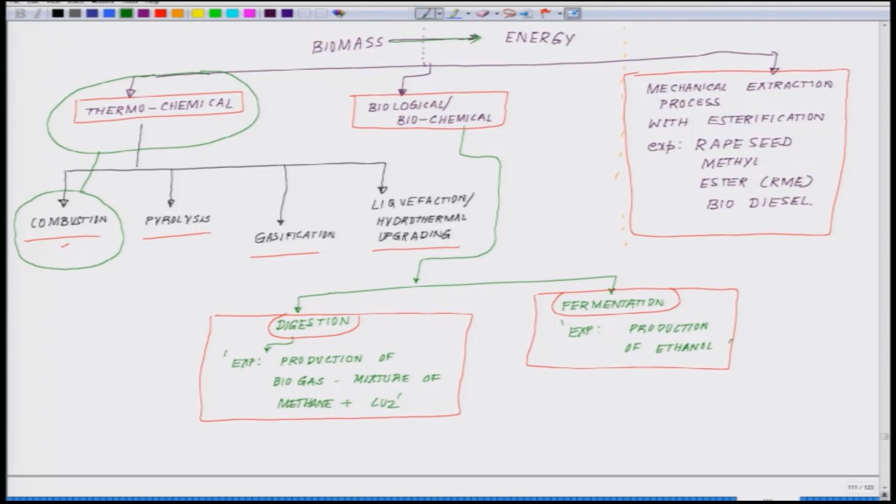So, today we will come back to the chart where we left in the last class. This was the outline we formed, biomass to energy formation, and today our goal will be to understand the most primitive and simplistic of all thermochemical processes, the combustion process. So, let us move on to the slide. As we do in every class, first we will talk about simple combustion.

Combustion is a very straightforward thing. You take a biomass, paper, vegetable waste or anything, and you all have seen cow dung being dried and used as a fuel. Every Indian has seen this. Each one of us has seen people cook with wood during the winters or any other day. These are common things. So, wood is a biomass, cow dung is a biomass, and you are burning them in the presence of air. That is all combustion is about.

When you burn something in the presence of air, you have oxygen in the environment. Your biomass has a lot of carbon, it reacts with the oxygen, and it generates 2 things: carbon dioxide plus heat. Now, what you do with that heat is very important, and how you can process that carbon dioxide. So, let me graphically put across what I have just said.

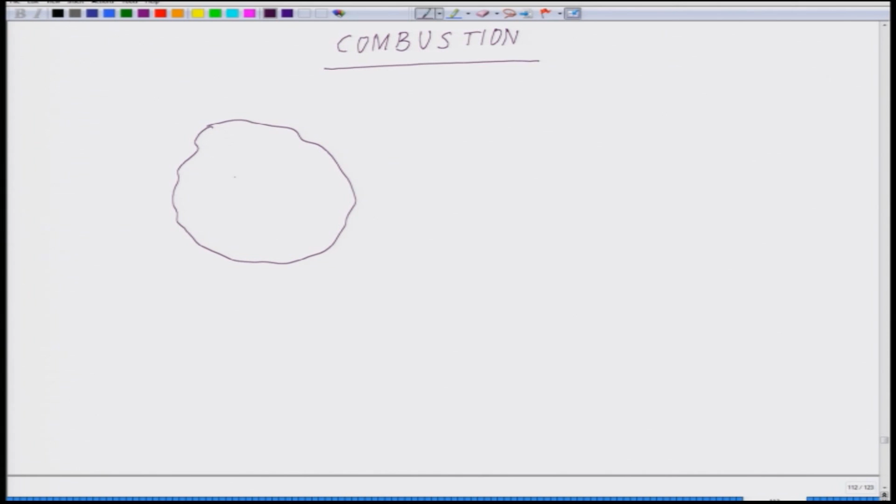So we are dealing with combustion, and say we have a finite amount of biomass here. One thing you all must have observed in villages or rural places is cow dung being used as a fuel after drying. What that drying does is remove the water from it. This brings you back to the very first point about the properties we talked about, intrinsic water and extrinsic water. Remember, we talked about the water concentration.

So, essentially you are getting a biomass, the feces of a cow or a buffalo, which is rich in water. You are drying it in the sun, getting rid of the water, and then using it. You can think of it very simply. Let me go to the new slide. So, say for example, you have cow dung.

This is a good example for you to understand. So, you have two routes. One route is that, so it has a significant amount of water trapped in it, okay, plus of course carbon material, carbon and all other things: carbon, hydrogen, oxygen and nitrogen, phosphorus, sodium, potassium, likewise.

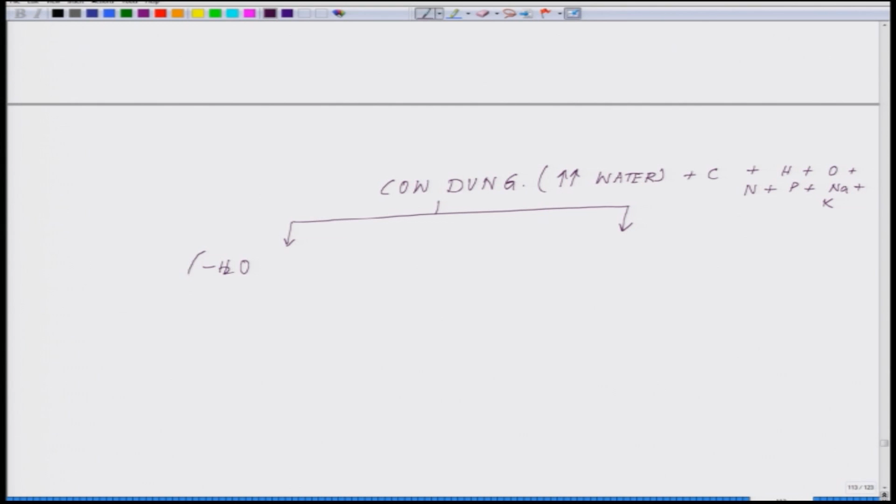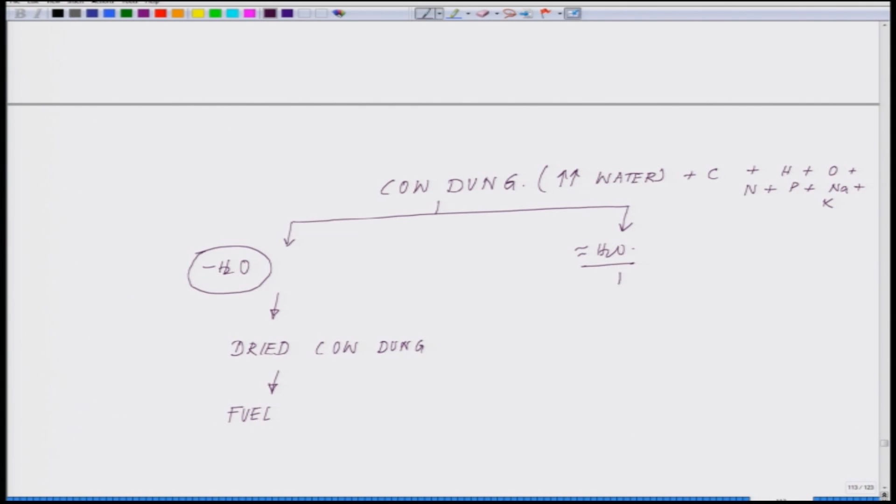Okay. Now, one route is you dry this, you remove the water, and what you get is dried cow dung, which is a fuel for burning. Whereas, you can follow another route: you keep the water intact, and along with the water you put it in a closed chamber, which is a biogas plant.

So, what will happen in the biogas plant, because of the microbes which are present out there, this will go through a process of digestion and also a certain degree of fermentation will take place, you cannot avoid it, and this is going to generate gas. And this gas could be used for cooking, which most of the places in our country, especially the rural places, use.

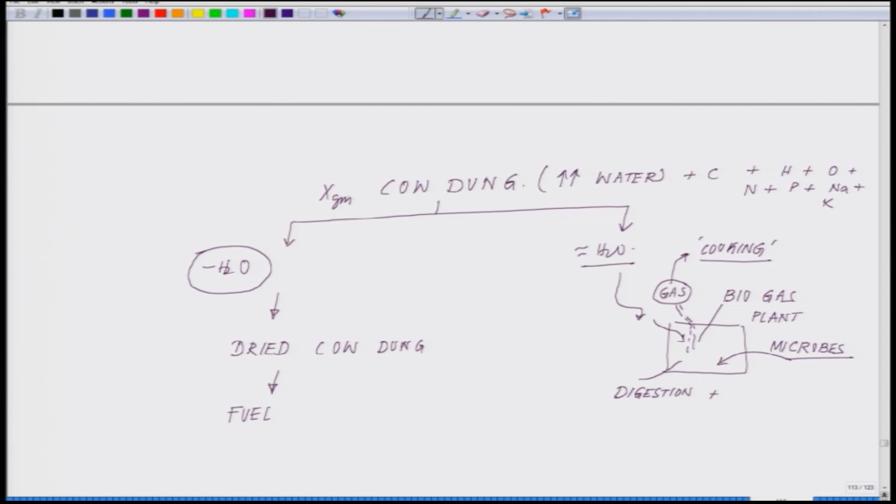Now, see, such a small simple thing, and mankind has been doing it since ages. It is nothing new that only today we have started it. But what is important is that these technologies have to be fine tuned with time, made more efficient, and what is important here to realize, depending on the total, say x gram or x kilogram or x ton,

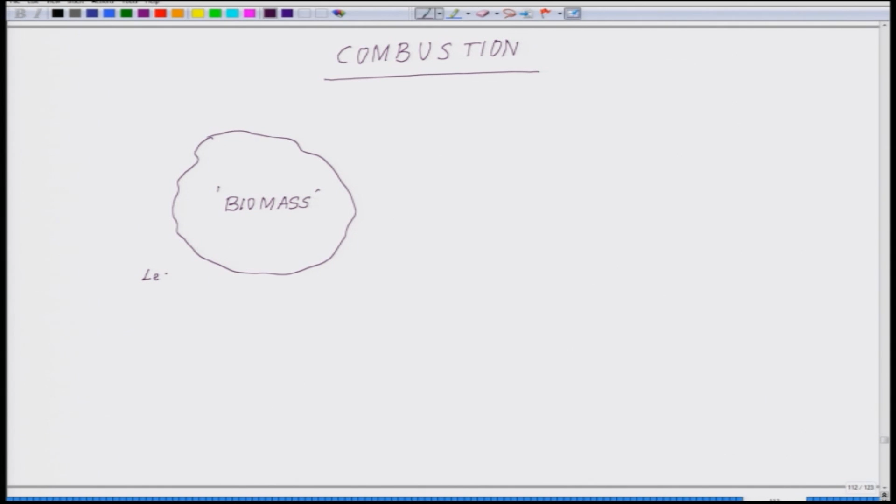how much fuel we are getting out of it and how much we are losing as ash, that defines the efficiency of that fuel. Okay. So when we are burning this fuel, we are generating heat and CO2. So, coming back to the previous slide, when you have the biomass, if you are going for the combustion route, you have to ensure less than 50% water. This is very critical. In other words, you dry up the sample significantly, so that at least 50% or more of the water is lost. Otherwise, this is not suitable for combustion.

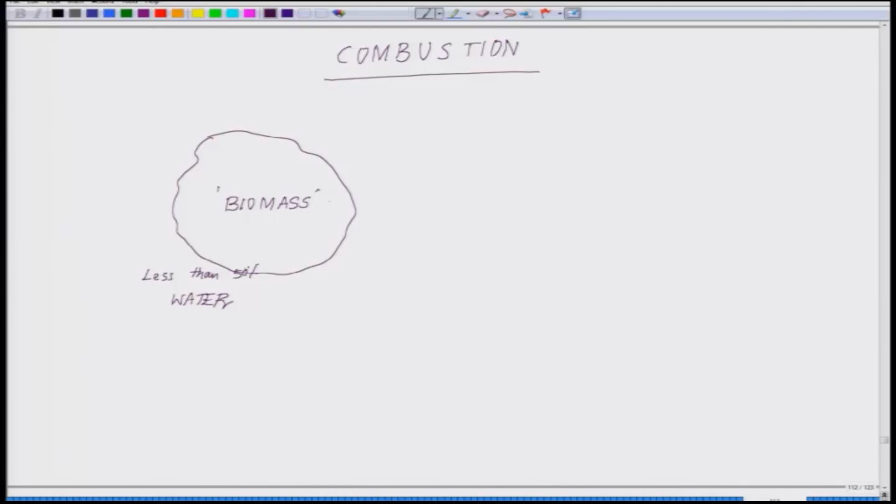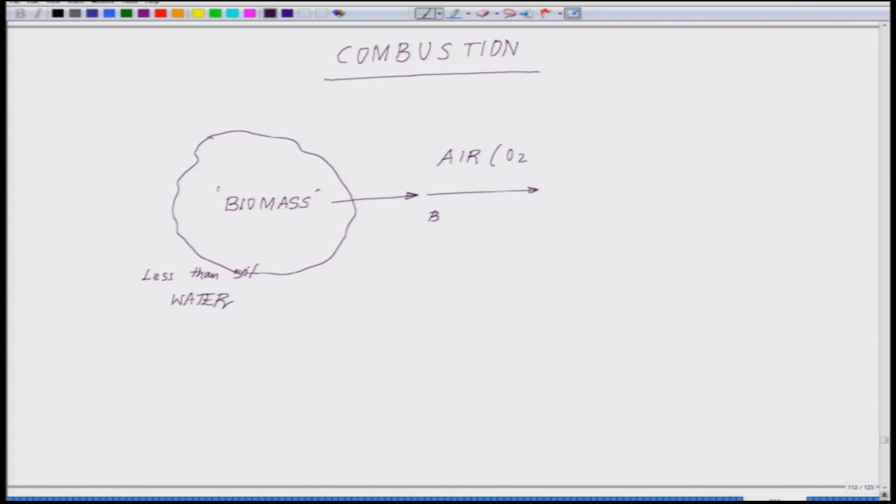Now, you burn this in the presence of air or oxygen. What you are generating, apart from carbon dioxide, because this has a lot of carbon, carbon dioxide which is going to the environment, which is a tricky thing of course, and that is where we talk about a lot of carbon capture, what you are generating is heat. Okay. Now, this heat could be utilized for several things.

What you can do with this heat is use this strategy to develop a stove, which is the most simplistic of all. You can develop a furnace, okay. You can develop a boiler. We will talk a little bit about boilers later. You can put it in steam turbines. Similarly, we can put it in turbo generators. These are, to name a few, what you can do.

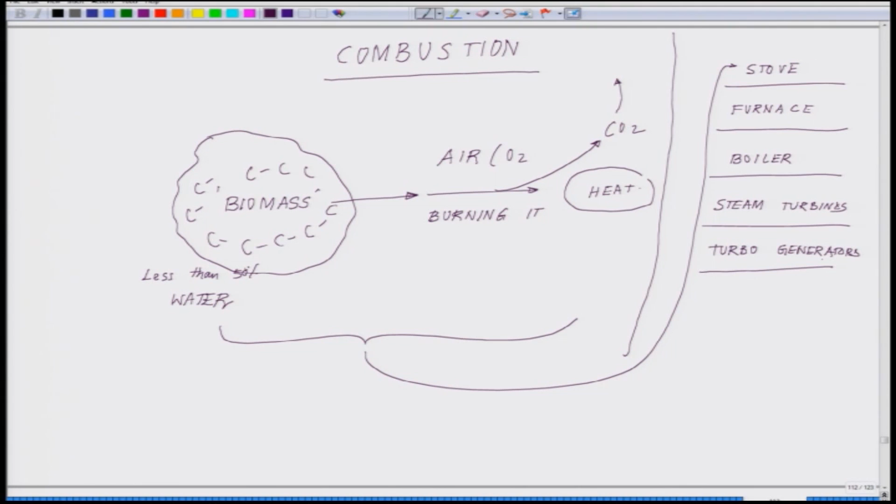And what you are essentially doing, if you remember the last to last class, you are breaking these bonds, and this chemical bond energy is liberated in the form of heat energy. Okay. This is how we carry out the process. Now, while running, say, a boiler or steam turbines, what you are essentially doing is converting the heat through the steam, and we will talk about boiler design briefly in a sec.

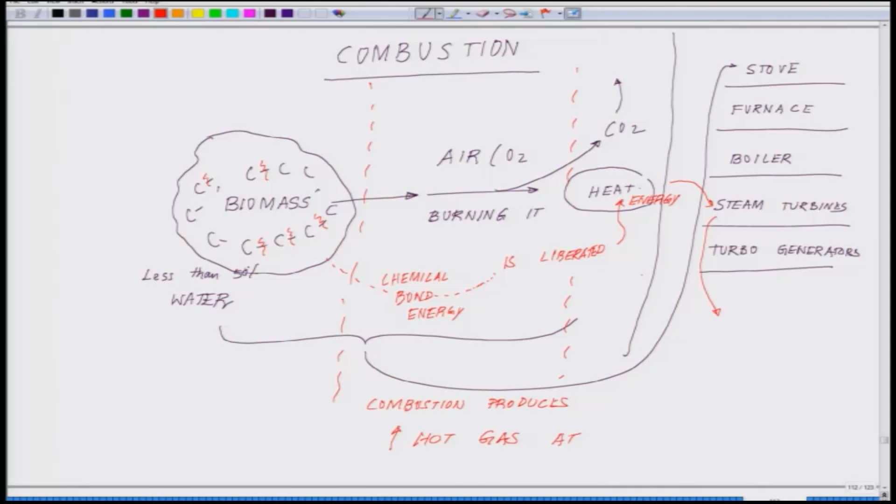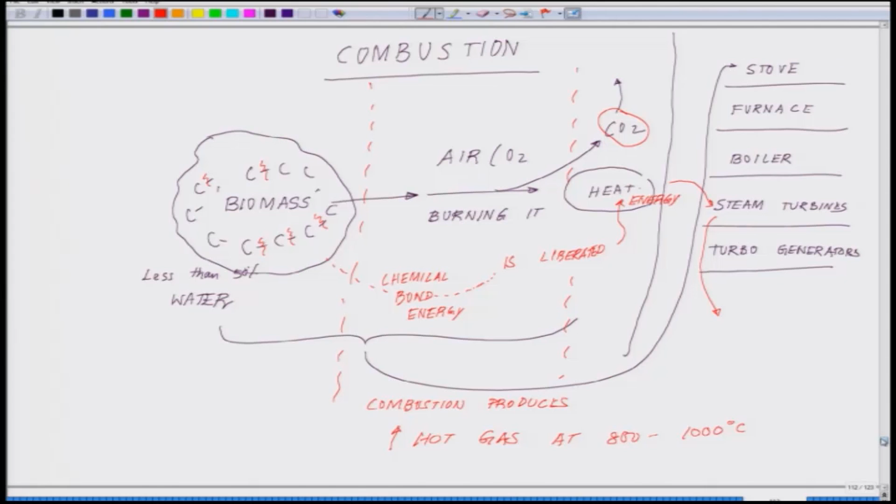So, just before I get into this, what is important to know is that this whole combustion process produces a huge amount of hot gas, a lot of it rich in carbon dioxide, at around 800 to 1000 degrees centigrade. Okay. Now, coming back, the question is, what kind of combustion plants are we talking about?

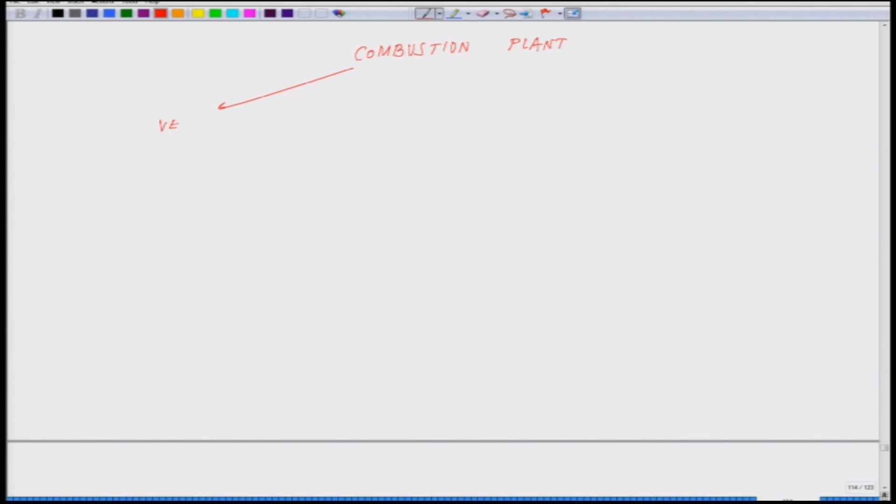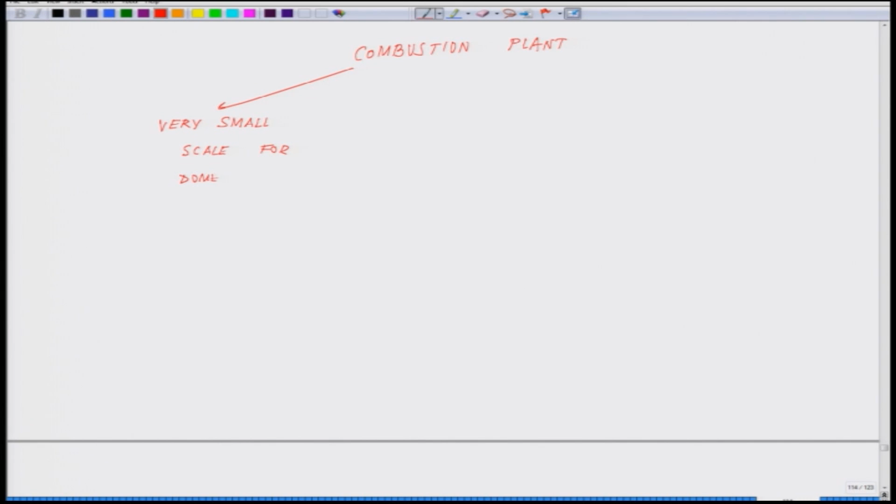The combustion plants could be as simple as very small scale for domestic use or domestic heating purposes, or it could be as large as a 100 to 300 megawatt large scale industrial plant.

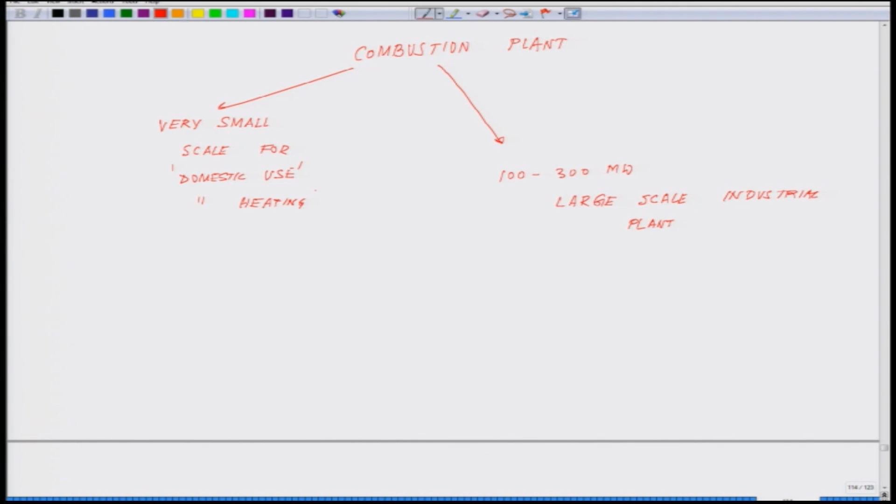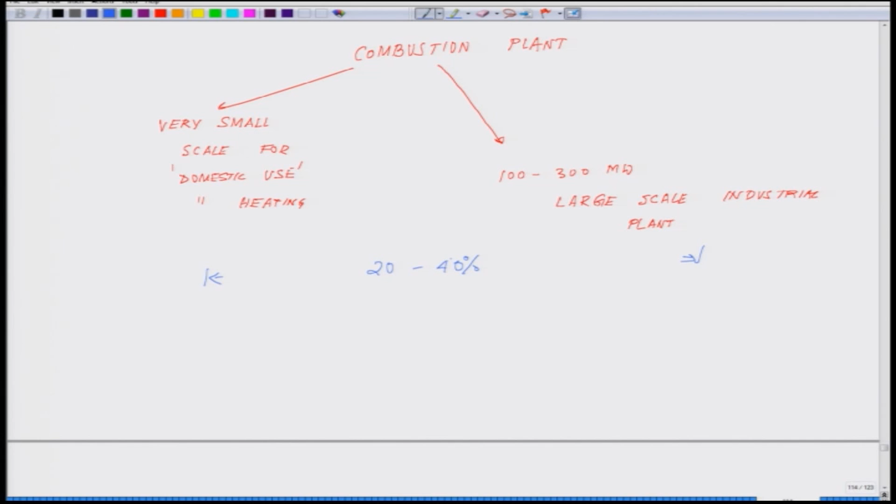Okay. So, this is the conversion, but interestingly, if you look at their efficiency, as I was telling you, the efficiency is around 20 to 40%. Net bioenergy conversion efficiency in the power plant ranges from 20 to 40%, whether it is a small or a large plant.

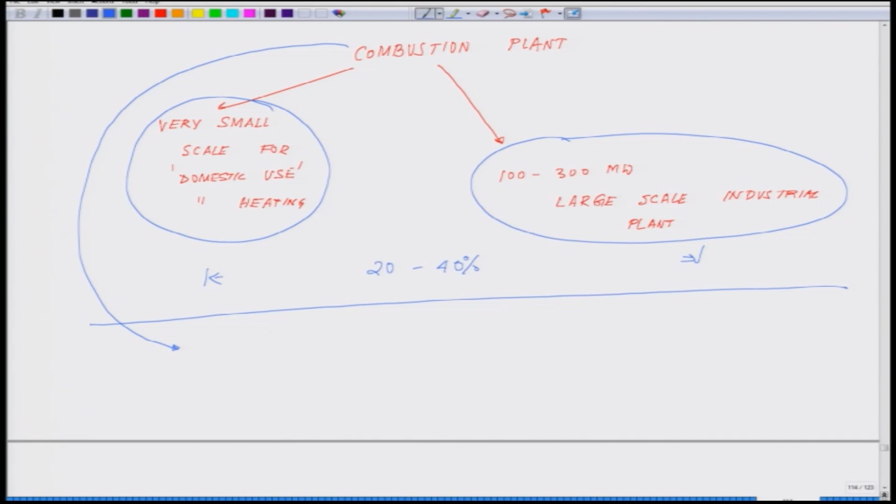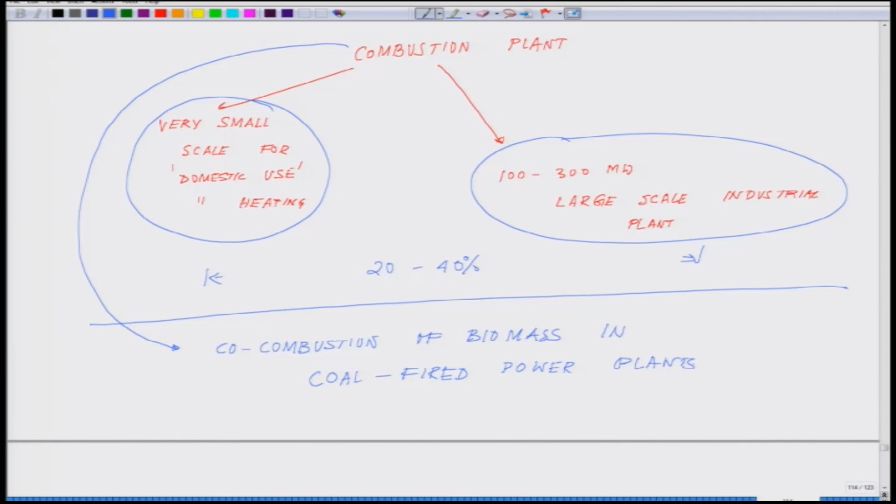One of the ways by which one can really increase this combustion plant efficiency is co-combustion of biomass. Now, we will talk about what that means: co-combustion of biomass in coal fired power plants. Okay. So, what are coal fired power plants? Before we get into the coal fired power plants, we will talk just a little bit about the heat.

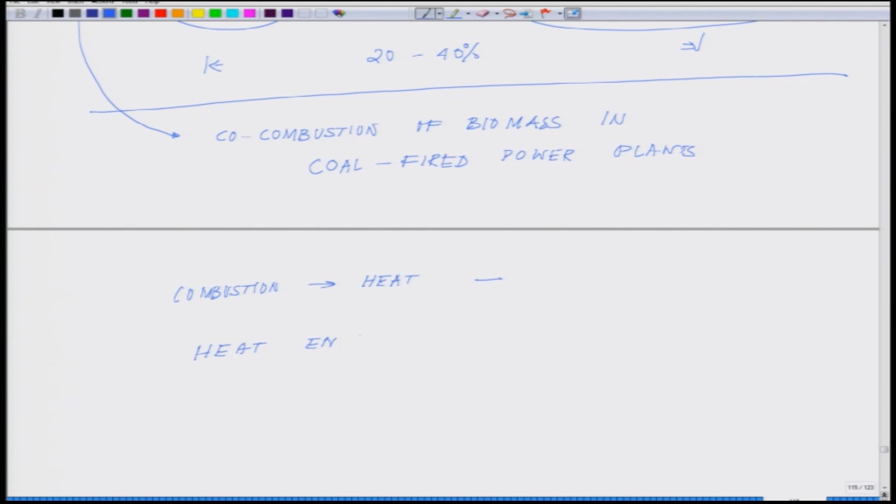So, what we are doing through combustion is generating a lot of heat. One of the ways is that you use it in heat engine cycles. You can feed this heat to heat engine cycles. One example is the Stirling cycle, which uses combustion to provide the shaft power. So, you are moving the shaft. Basically you are converting the heat into mechanical energy, shaft power, directly.

But very interestingly, the development of the cycle is presently limited to a small power output. Development of such cycles has limited power output. I am just putting OP as the output.

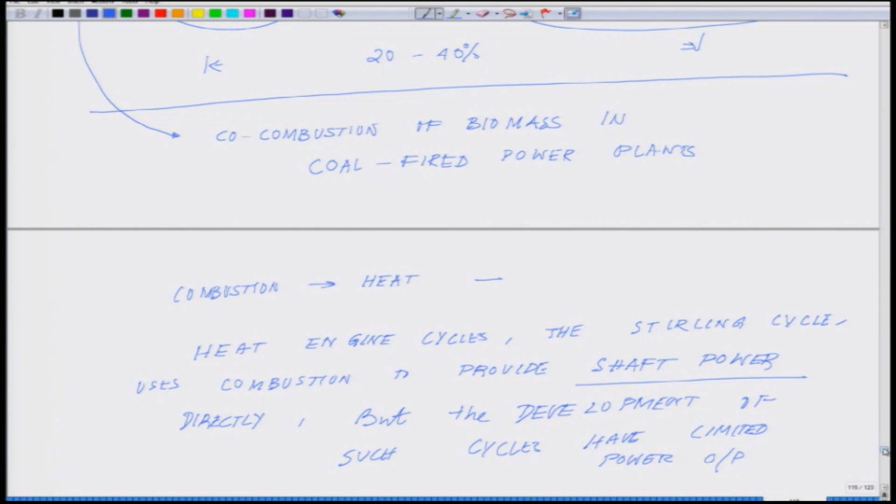Now, coming back to the combustion plants, we are talking about coal fired combustion plants. For those who have never been exposed to this, first try to understand what happens in them. There is a boiler filled with water. Underneath, you have coal. Most of these coal fired plants grind the coal and put it there, and you heat the coal. As the coal is burning, the water starts to boil and generates a huge amount of steam. This steam is funneled through a tube and fed to a turbine. Because of the impact, the turbine starts to move, and once the turbine moves, the generators also start to move and generate the electricity.

Let me put the schematics for you, that will make more sense. So, you have a boiler sitting here. Underneath the boiler you have this coal. In the presence of oxygen, you are heating it. So, you are generating a lot of CO2 and a lot of heat, and this heat is fed to the water, boiling it. This is generating a lot of steam. The temperature of steam from such boilers comes out to be around 600 degrees centigrade.

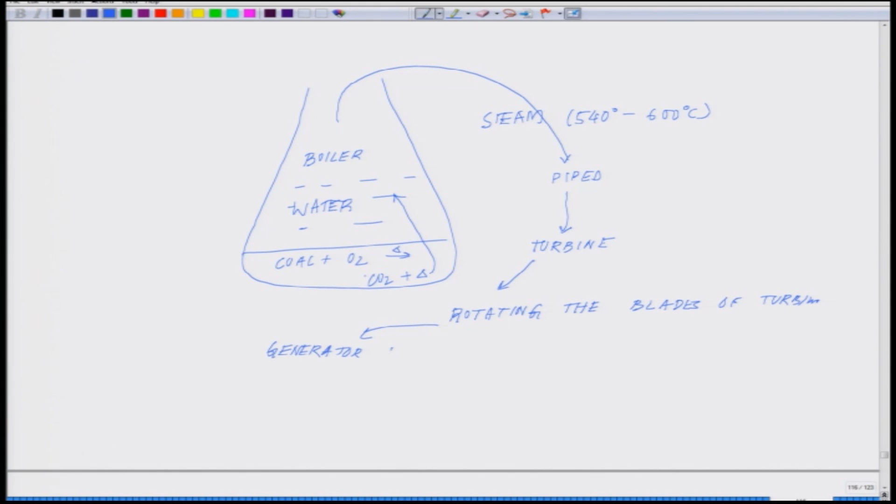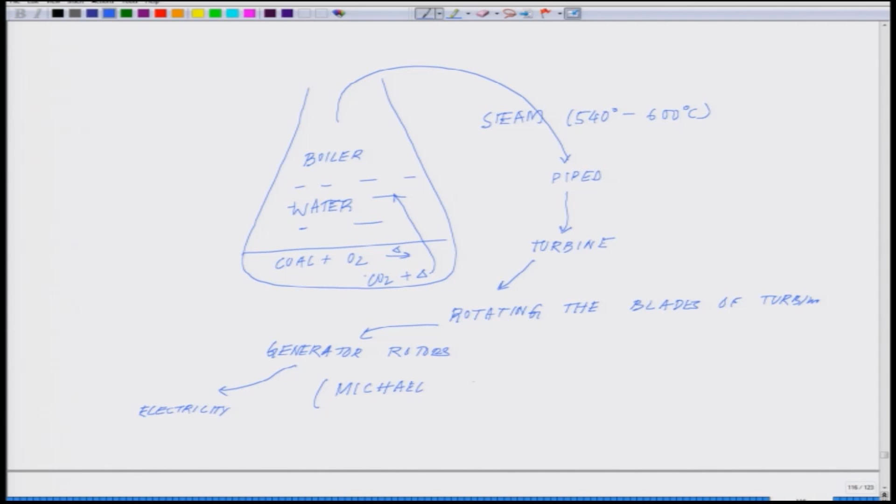This steam is piped through a funnel to a turbine. The turbine blades start rotating because of the impact, and rotating the blades of the turbine activates the generator rotors, and these generator rotors then generate the electricity, which follows Michael Faraday's electromagnetic induction. So, this is the basics.

Electromagnetic induction. I do not know how many of you have seen it. There are bulbs attached to dynamos. When you ride the bicycle, the bulb glows because the mechanical energy is translated into electrical energy by passing it through the coils. So, just go back and check the basics, and if time permits I will definitely come back to this. But what is important here? The point I am trying to make is, it has been observed.

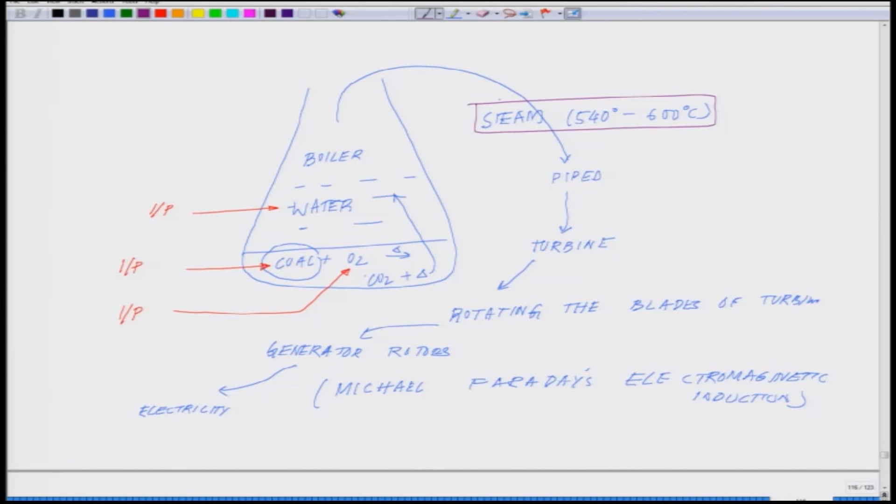So, if you look at all the inputs you are putting in for generating electricity: you need a regular supply of coal, you need a significant amount of oxygen. These are inputs, I am just putting IP, okay, inputs. You need fresh boiling water all the time. And your outputs, let me put another color on that, your outputs are steam, which is an output, and a significant amount of carbon dioxide as your output, OP, okay, output. And then you have to run the turbine. So, you have to have the materials, you have to have the piping which can withstand this kind of temperature.

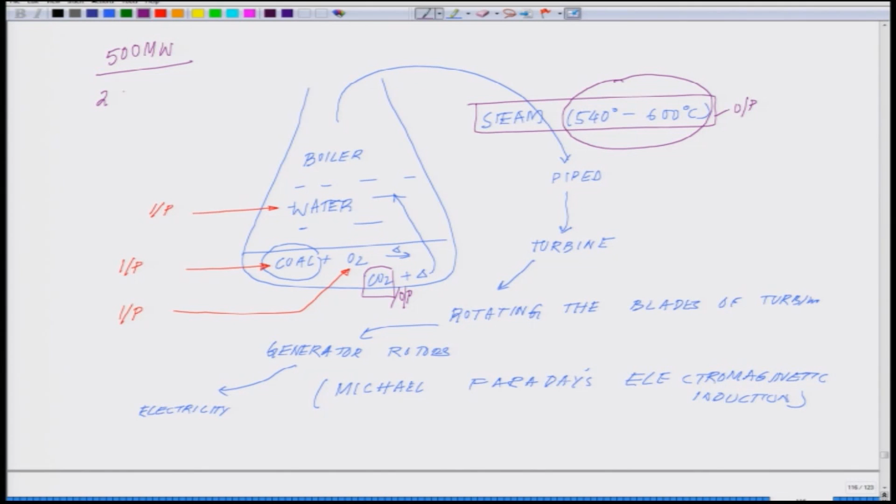And if we talk about a standard 500 megawatt plant, you will realize that to run a 500 megawatt plant continuously, you need 2 million tons of coal per year. Mark this number. So, this is the input we are talking about, okay? And for 500 megawatt power, you need 1.6 million cubic meters of fresh, good quality air. This is the second requirement when we talk about the air. Okay, this is the second requirement.